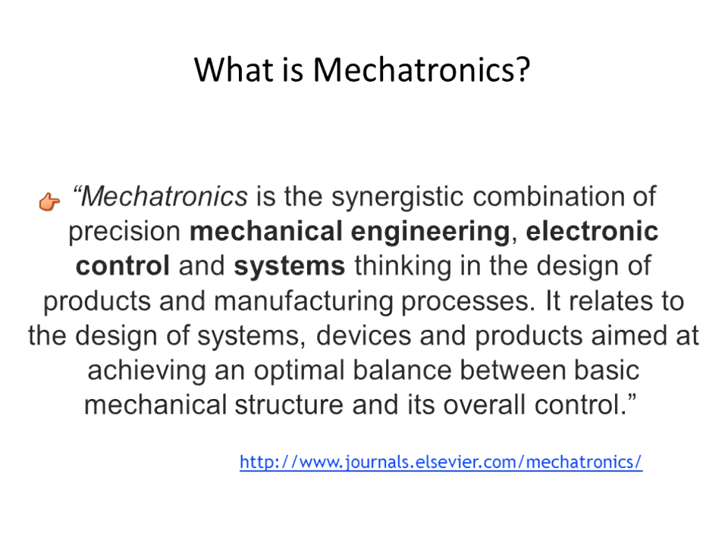Let's get started today by asking you a question. Does your institution have a mechatronics type of program? Please use the polling box. Go into the upper part of the screen. I can see many of you clicking on it right now. It's either yes or no. Look for those four horizontal icons above everybody's name, and go ahead and click on it. By the way, if you've got one, put it in the chat window what it's called.

We'd be very interested to see in the chat window what your programs might be called. You can see a number of people called them mechatronics. I guess that's not too surprising, is it? Thank you for that input. I'm not going to give you much more time to answer the poll, because you know the answer, it's either yes or no. Here's the countdown for the poll: 5, 4, 3, 2, 1. Let's take a look at the responses.

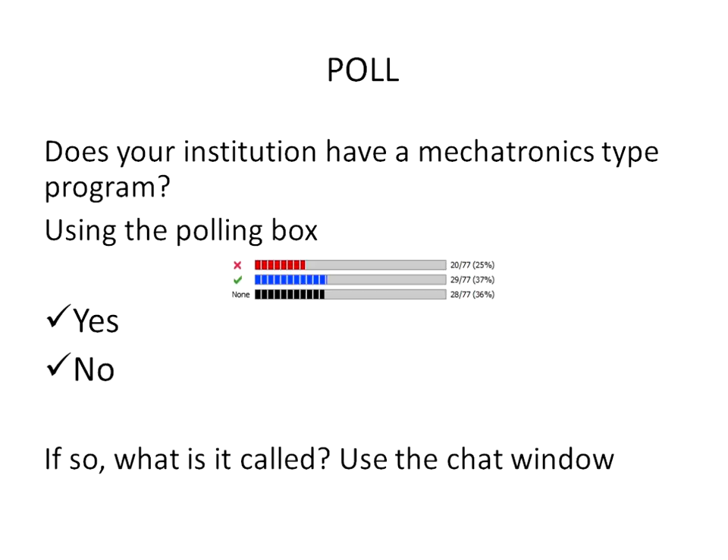Very interesting, Gary, Don, Julian, we have a slight favoring for those that do have programs. About, I don't know, a little more than half of the respondents here have programs and the others don't, so a very interesting mix. As I look in the chat window, you'll see an interesting program called Applied Integrated Technology, others simply called Mechatronics, and some have more than one. In New York State, there's the Mechatronics Certificate and Associate programs. Engineering Technology is another one. In Florida, it's the Mechatronics Certificate. And there are several proposed ones, one in Mechatronics Design, another Electrical and Mechatronics Engineering. I think, presenters, what this means is what we already know: there's many ways of looking at this equation of what mechatronics is and how it's implemented.

So let's go forward today. I'm now going to turn the floor to Julian. Julian, I'm looking at the slide that says why mechatronics, your picture is in the upper right corner, that's how the audience knows you're talking to us. So why don't you go ahead, Julian.

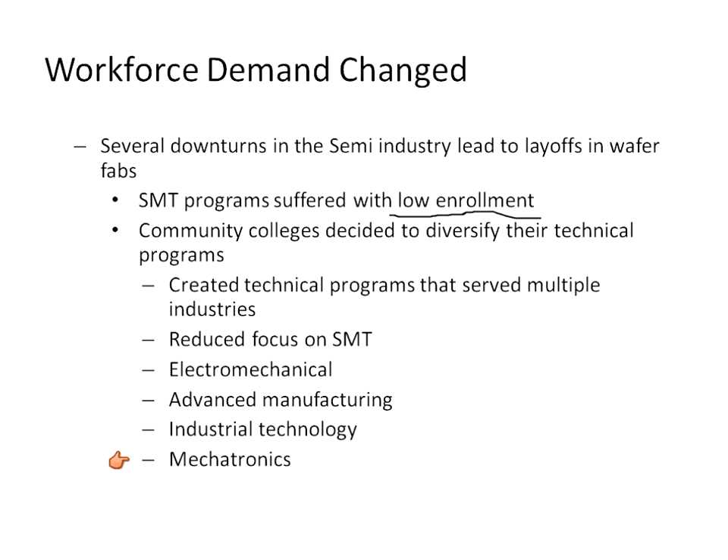And so then curriculum advisory committees suggested that they maybe focus on developing skills that could be used by graduate technicians in a variety of industries. And so some colleges developed electromechanical programs, advanced manufacturing, industrial technology, and mechatronics. So we can flip to the next slide.

So, moving forward in 2010, when I arrived here in Global Foundries in Malta and met with many of the Malta managers, I pretty much decided that what I needed to do was to do a skills assessment to find out what kind of skills would be needed of equipment maintenance technicians here in Malta, New York.

And I knew that MATEC had developed an equipment technician skills standard assessment back in 2000. So I contacted Mike immediately and asked him for a copy of that assessment in an Excel spreadsheet. This particular skills standards assessment was developed in cooperation with a number of semiconductor companies, and I believe there were about 47 technicians who were interviewed to get the types of competencies used by equipment technicians in a 300 millimeter wafer fab.

So we can skip to the next slide, Mike. This slide shows the 47 subject matter experts from Arizona, New Mexico, Texas, and Vermont, and you can probably guess which companies were located in Arizona and New Mexico. That was probably Intel, and Texas Instruments, and possibly Motorola. And in Vermont, I would imagine it was IBM.

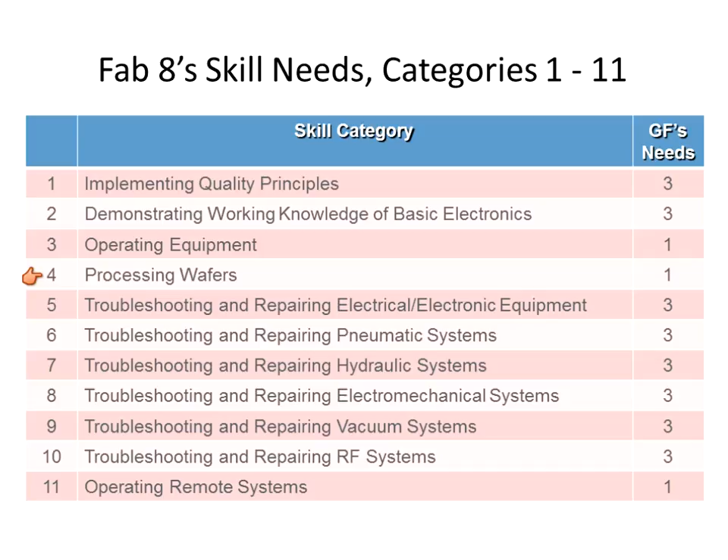What we think are important are these other things, like, for example, troubleshooting equipment of a variety of types, like electrical, pneumatic, hydraulic, electromechanical, and vacuum systems. Those are highly important. So you get an idea of which kinds of skills are preferred by Global Foundries in Fab 8.

I sent the same assessment tool to 6 or 7 community colleges in our region, and asked the department managers of the different programs to do a self-assessment of how they rated themselves or their programs against these competencies. They all sent me back their self-assessments, and I lumped them together and averaged them out, coming up with these numbers. On the right you see community college statistics.

Well Julian, how many colleges did you do these self-assessments for? I don't recall exactly, but between 6 and 7. Yeah, I thought you said 7. Yeah, that seems about right. Okay, go ahead, we're on the right side.

The items in a red rectangle, we indicated as being skill gaps. We rated these particular skills very high, but the community colleges indicated they didn't feel they had a strong enough program, or maybe didn't have a program available yet to cover these areas. This is what I refer to as skill gaps—things we need but are not available, indicating something needed to be developed, either through the colleges or within GlobalFoundries.

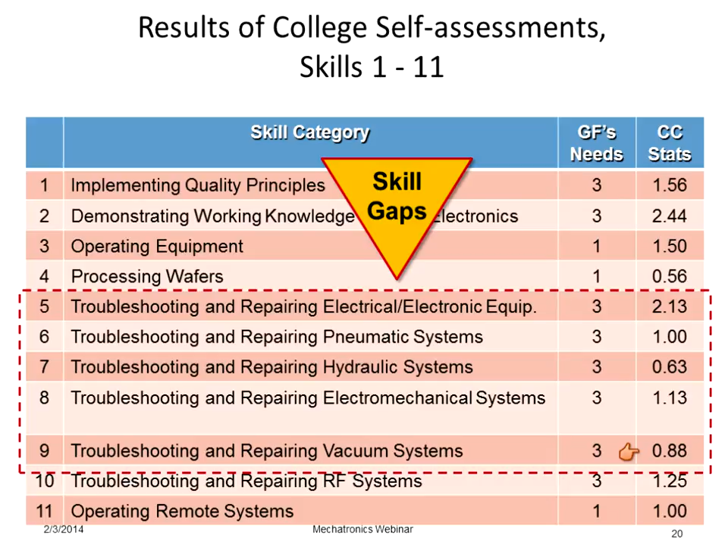So I'm going to skip to the next slide. What's the impact of these gaps? To us, it means that if entry-level technicians don't come equipped with the skills we need, this increases the learning curve for entry-level technicians. Our senior technicians will spend a lot of time training entry-level technicians on skills they should already have. As a result, the mentor's time and the trainee's time costs us dollars, and there's greater impact.

Next slide, more impact. If we have unskilled, not-yet-certified technicians, these uncertified technicians cannot perform tasks and jobs that require certification. This increases the workload for certified technicians, and as a result, some work gets delayed because we have to take time to train technicians that aren't quite ready to do work independently.

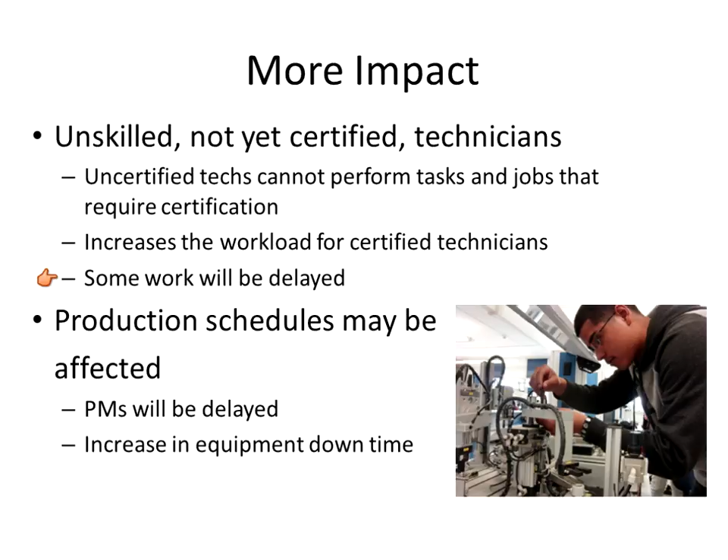All right, next slide: strategy for closing the skill gaps.

Out of all the skill gaps, we decided on the most important ones that needed to be addressed by GlobalFoundries and our community college partners, who are working very closely with us to develop some of these courses. Most of the work is with Fulton-Montgomery Community College, Hudson Valley Community College, Mohawk Valley Community College, and SUNY Schenectady County Community College—these are the ones we're currently working closely with to help develop some of these courses.

The ones we considered at the top of the list include pneumatics, hydraulics, electromechanical, vacuum, RF power, and automation. Basic safety, although not included in this list, is understood by all the colleges to be included in each of these courses—so whenever they're developing courses, they also include basic safety concepts, including lockout/tagout of equipment.

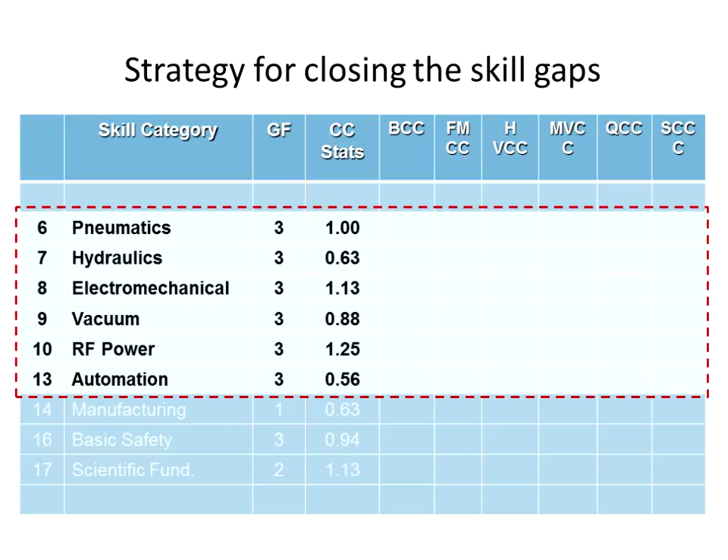While I was in Texas, before coming to work here, I had the opportunity to visit the Texas State Technical College campus in Harlingen, Texas, and got a tour of the Mechatronics program there—I was really impressed with what I saw. This is the logo from that college. Mechatronics seems to be a program that provides the skills and knowledge for students to work in a variety of fields like aerospace, medical, defense, manufacturing, and automotive.

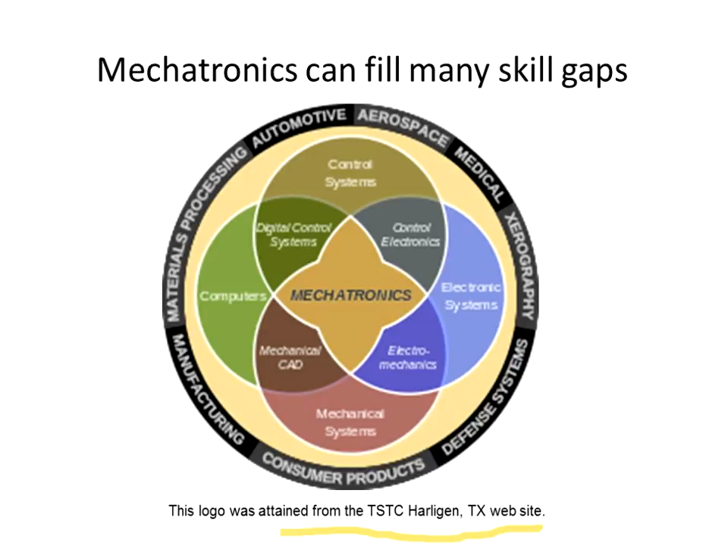We are now working here in this area with Schenectady County Community College, Fulton-Montgomery Community College, and Hudson Valley Community College. We're working together to try to institute this kind of one-year certificate in mechatronics as well.

I'm going to skip to the next slide now. Fulton-Montgomery Community College Mechatronics Training System. This is the training system that's used by Fulton-Montgomery as part of their mechatronics training. It's manufactured by Amatrol, and it's kind of like a manufacturing system, with different methods for conveying materials from one place to another.

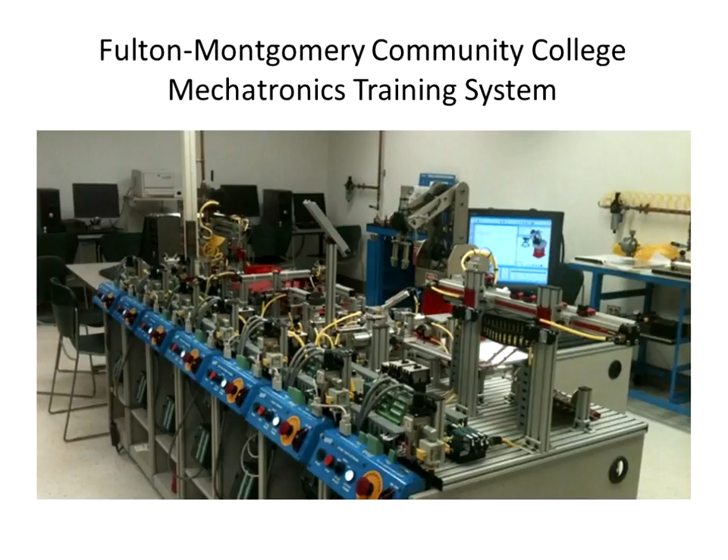Going to the next slide. This slide shows you the curriculum being proposed with the TAACCT grant that has been provided to the State University of New York, and is working with community colleges in this area. This program is very similar to the Florida State College Mechatronics program as well. This is also a one-year Mechatronics Certificate program. It's pretty much a copy of what they've done in Florida.

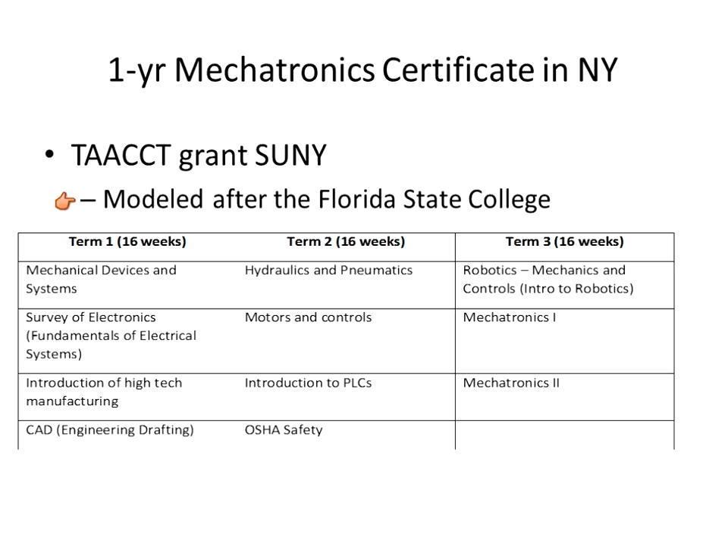So that pretty much covers it for me. Now I'm going to turn it over to Don, and Don will introduce you to a day in the life of a mechatronics technician. Okay, well, good afternoon, everybody.

Like Julian, I'll give you a little bit of background into my experience. I started off, as I mentioned before, at Intel about 19 years ago, as an equipment technician at Fab 6. A few years later I accepted a position in equipment engineering, basically mechanical engineering, where I was a tool owner. A few years after that I decided to jump into the management role, and I've been in management for about the past 11 years, managing mainly equipment technicians and equipment engineers, up until recently, the last 6 months, taking on the technical training initiative for all of the Malta site. The reason I took on this initiative is I have a passion for the technicians' role and the engineers, and supporting them and getting the tools they need to be successful.

I identified some gaps I was seeing as a manager, as a section manager within the engineering ranks, and I wanted to bring my observations to this team to support and come up with creative solutions on how to close some of those gaps. So the surveys that Julian is referring to are all part of feedback that myself and the other managers gave. He did that before I came on board, but they mirrored the concerns that I have.

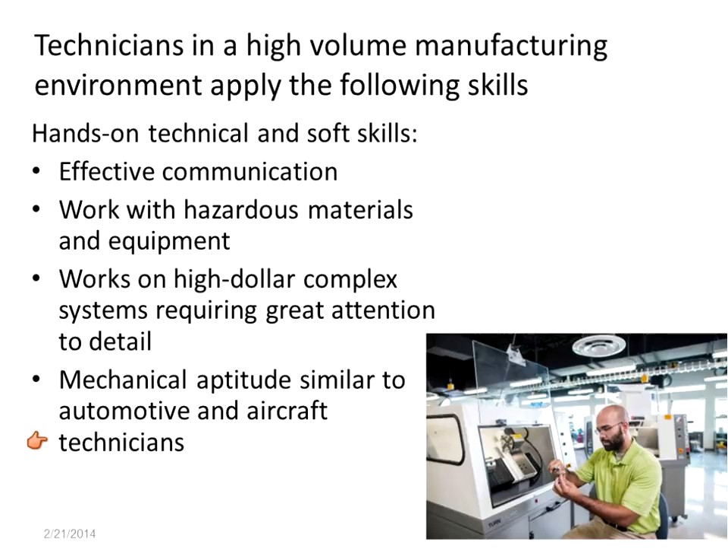The technicians are also more than just electronics focused. We have a lot of technicians that come in here with a strong electronics background, they'll go get an electronics degree because those degrees are readily available. But that's a very small portion of what they do in their day-to-day jobs. They work with automation, pneumatics, vacuum, RF, and depending on what role they're in the factory, countless other different skills are needed besides just electronics.

One of the biggest things they need to have, along with communication, is to understand troubleshooting methodology. They have to understand problem solving and critical thinking. These are individuals working on complex systems, and they have to be able to think outside of the box to find the best and most quality way of bringing the tool back up to production, because every hour the piece of equipment is down costs the company a substantial amount of money. So we really rely on them having those skills as well.

Also, the technicians aren't like the technicians of 50 years ago where they just sit on the assembly line and do their job. They have to interact with manufacturing operations, process engineering, equipment engineering, facilities, equipment customer services engineers, managers, and so on. A daily part of their job, which ties back to communication, is being able to work well with these other individuals in a teamwork environment, communicating effectively, and being successful not just for themselves but for the success of the team as well. So that's basically the day in the life of the technician.

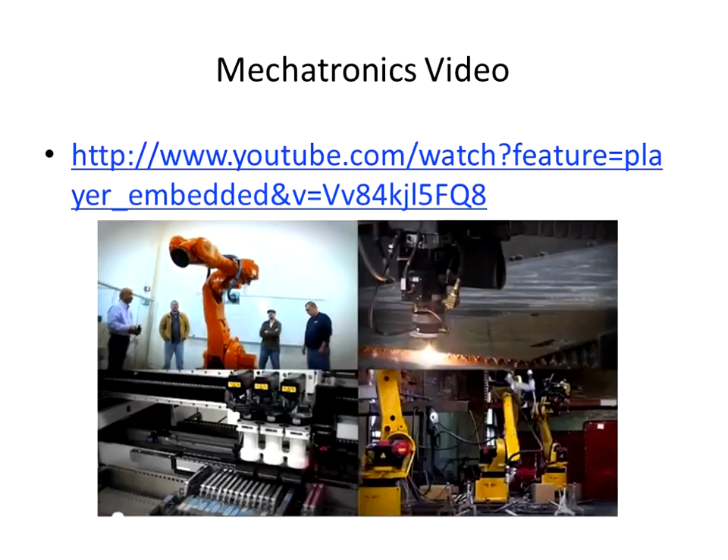Advancing on to industry recognized certifications, we as a development team felt that we wanted a third-party evaluator to take a look at the outcomes of our students. After a fair amount of research on certifications that are available, we selected as a team the Siemens certification.

The Siemens certification has three different levels, and our certificate prepares them for what I call about a level 1.5, but there's only a 1 and a 2, so they sit for the level 1 certification.

The Siemens certification does not require that everything be taught on Siemens. We do teach Allen Bradley in our PLC courses, but on our capstone trainer, the one at Fulton-Montgomery that you saw, we have Siemens PLCs on that capstone so that it gives students experience on another PLC, and it also prepares them for that certification. That's really the only requirement for Siemens as far as getting approval to offer their certification. There are other approvals they require, but from a curriculum standpoint, as long as they have some exposure to Siemens PLCs, they should do well.

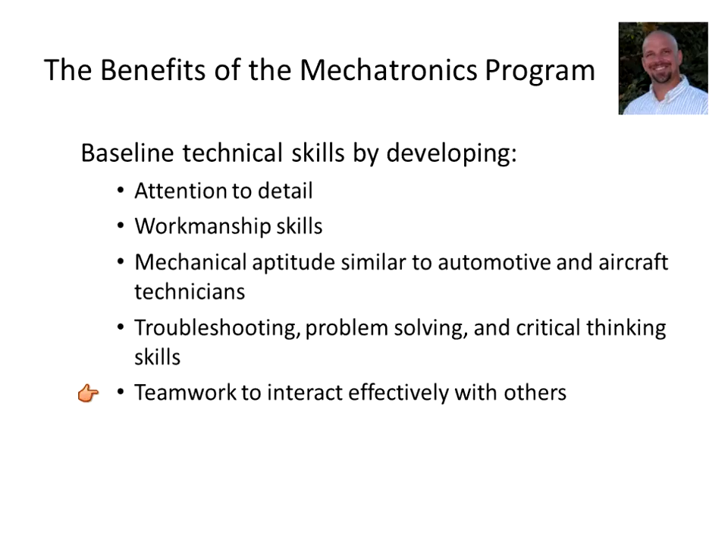Some of the other benefits, aside from the technical, is they're getting the expectations of the required safety standards. Previously, we weren't getting students coming on board being cognizant of safety requirements, because in a lot of education facilities they weren't really focusing on guarding and lockout, tagout, and things like that, because they weren't dealing with very hazardous systems. Then the students would come into our environment with kind of a complacent attitude when it came to safety because it hadn't been instilled. So they're building those safety standards into the curriculum, getting those skills and expectations early on.

It's also decreasing training time for our new employees. Julian touched on this, that when we have a senior level technician taking on a trainee and they have to go back and teach them basic hand tools or basic troubleshooting or basic problem solving, it takes a very long time to close those gaps. Not to mention the fact that it takes a long time for that trainer to work with them, so the trainee is not engaged as fast.

It's also draining the resources of that skilled technician. So as they're training, they're not able to work on more advanced issues because they're sitting there with that trainee for that amount of time.

So it also, as Mike asked earlier, eliminates the intimidation of the advanced manufacturing environment. They're able to see the tool at the component level, even though, as Gary talked about, we don't necessarily need them to troubleshoot at the component level. We want them to look at the system and troubleshoot at the system or modular level. They're able to see it at the component level and take away that intimidation.

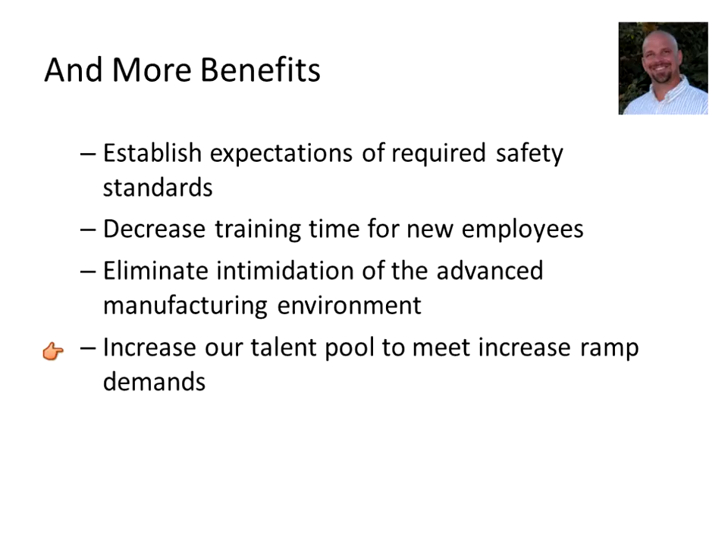So that's pretty much what we see as being the benefits in the mechatronics program. I'll go ahead and hand it back over to you, Mike.

Thanks very much, Don, it was interesting hearing your perspective. A lot of us paid attention to the comment you made about the need, in some cases, for untraining, as you referenced it, looking more at a systems level approach versus components. That's one of the gaps that exists between the current state of industry. It's not true everywhere, but it's certainly true in your system. We appreciated that comment.